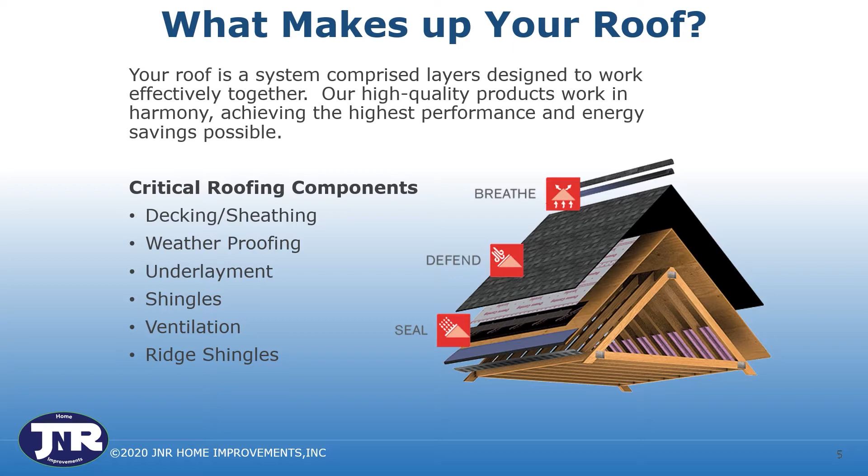Today we're going to do a product demonstration on the Owens Corning Cool Roof product. There are three primary components to a roof. One of them is obviously the shingle or the tile that would be the top layer. The second and most important component of a roof would be the underlayment. And then the third would be either called the decking or the sheathing, which would be the wood.

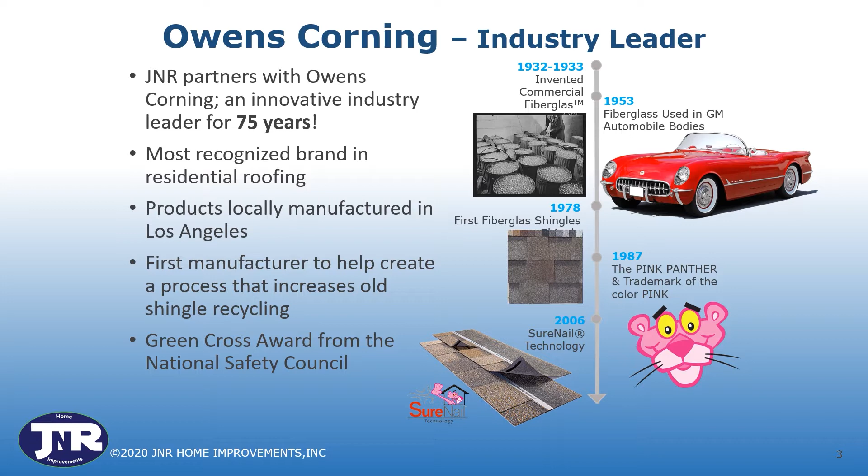We have partnered with Owens Corning, which is the premium manufacturer of roofing materials in North America. The company's been in business for over 75 years. It is the most recognized brand in the residential roofing industry. They're the ones that invented fiberglass, used the very first time in automobiles back in 1953.

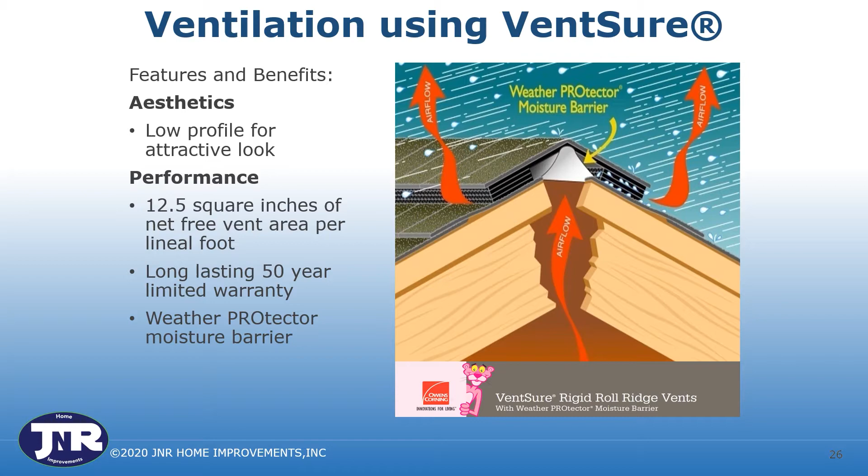So you've got the ridge shingle, then you've got the ventilation component of it. And as you can see here in this illustration, there's gaps in between the sheathing and the underlayment. That allows the roof to breathe. Now, what happens with a typical roof is that it gets heat from both sides. So you get your tremendous heat coming from the outside, and then obviously heat rises from the inside. And what you get is what we call a double bake effect, which basically is cooking that roofing material.

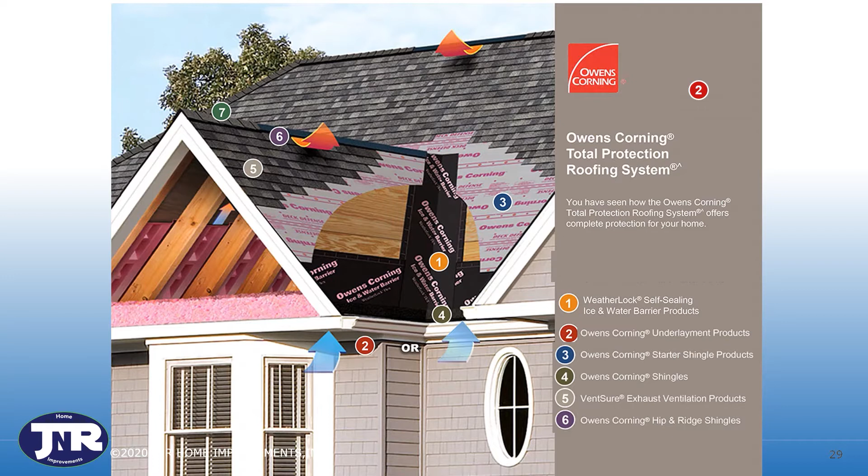In some cases, on a hot summer day, especially up here in the Antelope Valley, you'd be looking at upwards of 200 degrees. Now, the other component that we obviously are dealing with is the actual shingle. Owens Corning uses a much thicker shingle than a lot of the inexpensive materials that you would buy at, let's say, a Home Depot or a Lowe's. And for those of you who've purchased homes in the last, let's say 15, 20, 25 years, those roofs were only designed to last maybe 10, 15 years.

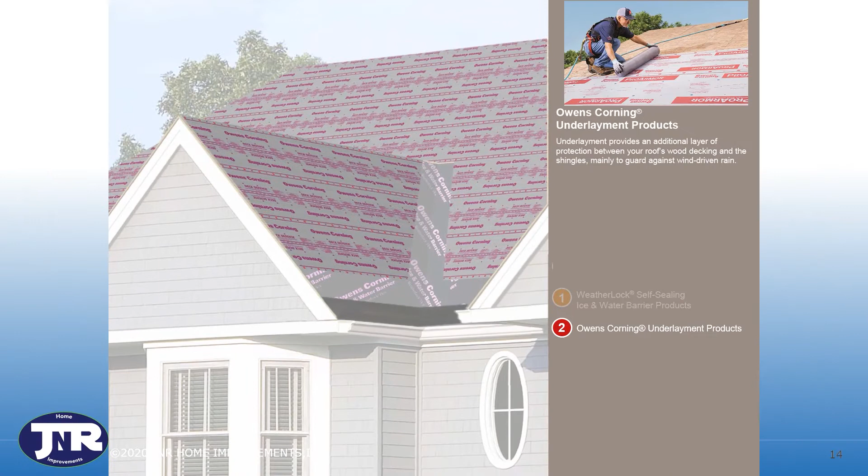And the reason for that is what's called the underlayment, which is by far the most important element of a roof. The underlayment is the moisture membrane or the moisture barrier that prevents water from getting into the wood or into the sheathing. Most inexpensive roofs use essentially a felt paper material, which is really no different than construction paper that's dipped in oil and tar. And you can see that it's very brittle. It tears just like paper.

And so the problem with that is that over a period of time, with the heat and the cold and the expansion and the contraction due to the external elements, this becomes an extraordinarily brittle material that essentially disintegrates. The underlayment that Owens Corning uses is a fiberglass underlayment, and the difference is that this is made out of hundreds and thousands of different fibers woven together that acts as a much more effective repellent.

So the layers of the roof start with the wood, with the sheathing. This is actually called OSB board, which is a much more rigid type of composite board that the premium roofers are using. On top of the decking comes the underlayment, right? So you've got the decking and the underlayment, and then on top of the underlayment goes the shingle, okay? So you've got really a three-part component.

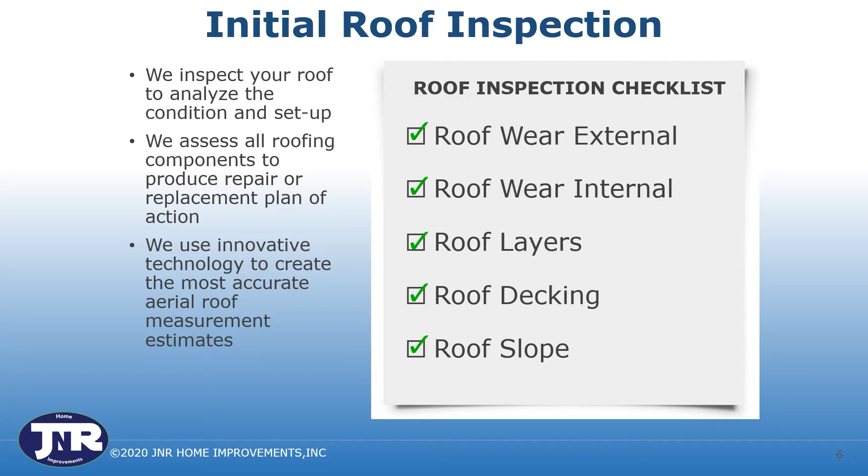The process with roofing is a multiple step process. So the first thing we're gonna do when we come out to your property is an exterior inspection, which would be to check to see how many layers of shingle you have currently. And we are actually going to get up on the roof. It's really the only way that we can identify some of the problems.

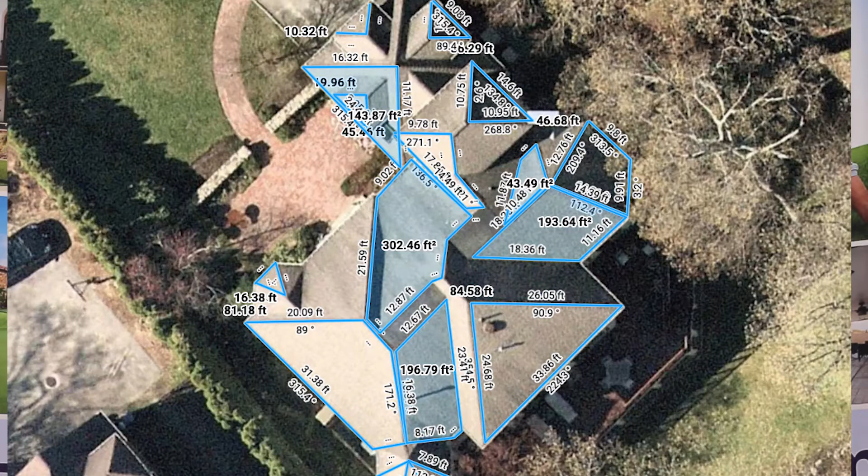The other way that we're gonna measure to get precise dimensions is we use a satellite imaging software, which basically takes a satellite image of your roof, allows us to do a very, very accurate measure, and that's gonna give us the ability to give you the proper price.

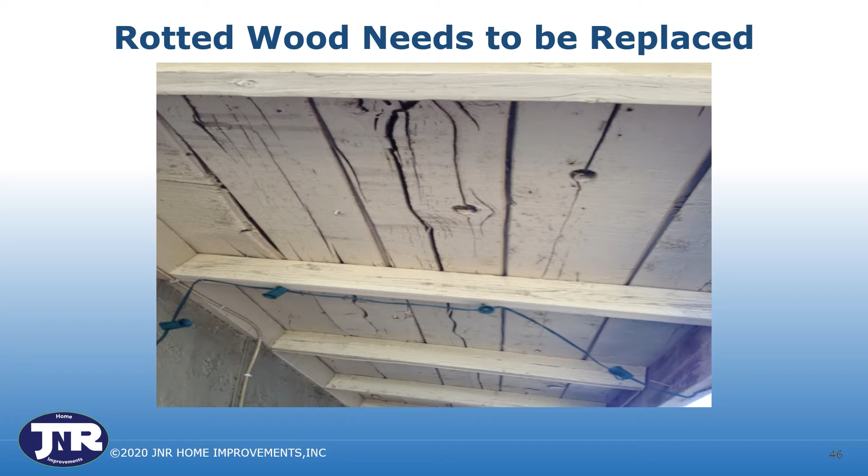Not only are we gonna come out and do an inspection, we're gonna get up on the roof, we're gonna look to see how many layers are already there. We're going to inspect the edges. A lot of times you've got damaged fascia board. The water has dripped under to the eaves and the soffit.

So one of the things that we're going to do is we're going to inspect the decking. Typically that is done from the inside. We would get up into the attic with a ladder and we would take very high resolution pictures. And what we're looking for is water, dark patches of water on the wood. And that typically is a newer leak. Anything that's older would be white and crystallized.

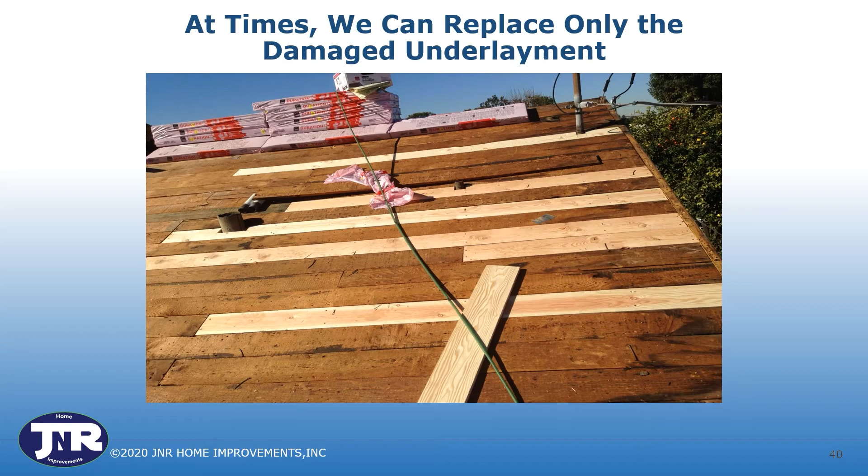Then we get up on the top of the roof. In order to inspect the decking from the exterior, we're gonna peel back the existing shingle so that we can get back and identify the wood. Most of the time we find about 20 to 30% of the decking needs to be replaced. In an older home, we probably would have to replace the entire decking.

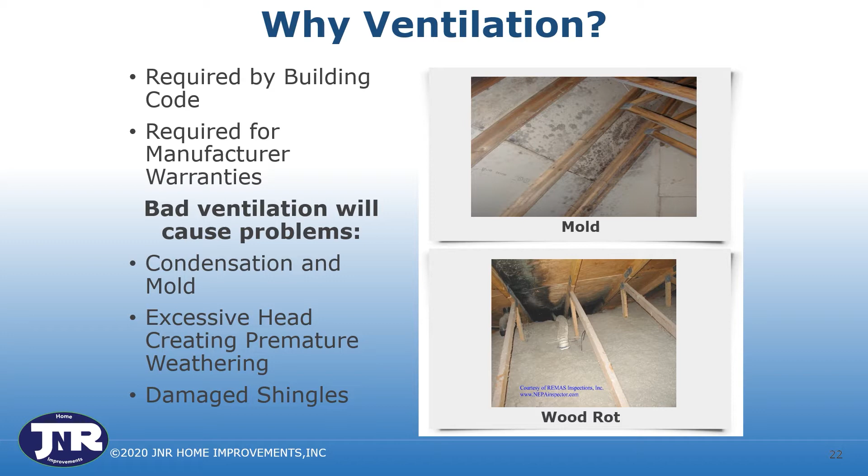When the heat comes from the inside up through the attic, it needs to be able to escape. That's why you see a lot of these kind of half circle vents, and you get the whirly-birds on top of the attic. Those are obviously for ventilation purposes.

The third problem that we see is what we call granule loss. An inexpensive roof or an inexpensive shingle is going to have tremendous loss of granules. Now the problem with that is that once the granules have eroded, which is really the layer that repels the water, you get much more water infiltration and moisture that gets absorbed, gets through the shingle, goes through the inexpensive underlayment, the felt dipped in tar and oil, and then obviously gets in and starts to affect your decking.

Now, the other thing, as I mentioned also, is the exposed fiberglass. We normally would see that at the peak of the ridge cap, but again, on an older roof, a 15, 20, 25-year-old roof that was really only designed to last 10 or 15 years, you're gonna see tremendous fiber exposure. Any erosion in the shingle is gonna increase what?

Water infiltration. The other thing that you're gonna deal with is buckling, curling, and cupping. And what that is, again, an inexpensive material over a period of time is not gonna lay flat on the sheathing or on the decking.

And then the other thing that we find is literally missing shingles. With an inexpensive roof that isn't bound tight or isn't nailed down properly, the shingles over a period of time just blow off. You'd be shocked. You get high winds, especially up here in Antelope Valley where we get really high winds. It's very, very common for shingles to literally blow off.

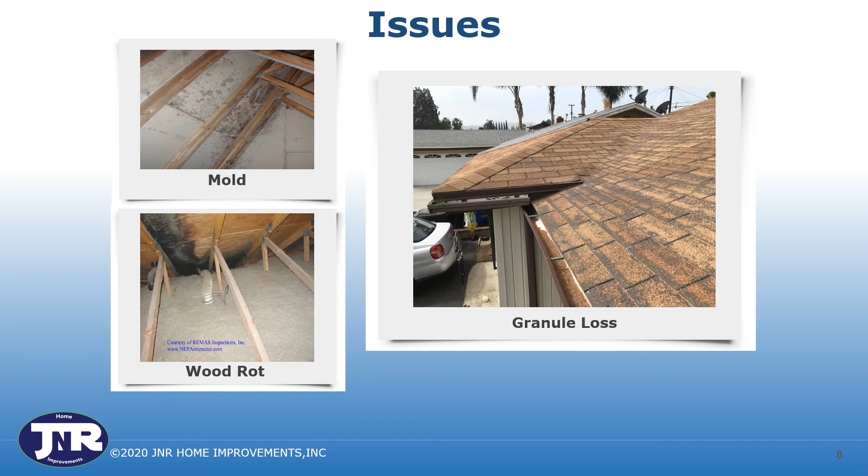Well, what is wood rot going to do? It is going to deteriorate and weaken the structure. A roof is heavy. So if you damage and deteriorate the overall strength and rigidity of the building material, it's very likely that you could have some structural damage. And then we're not looking at a $20,000, $25,000, $30,000 roof. We're looking at an $80,000 to maybe $140,000 overhaul.

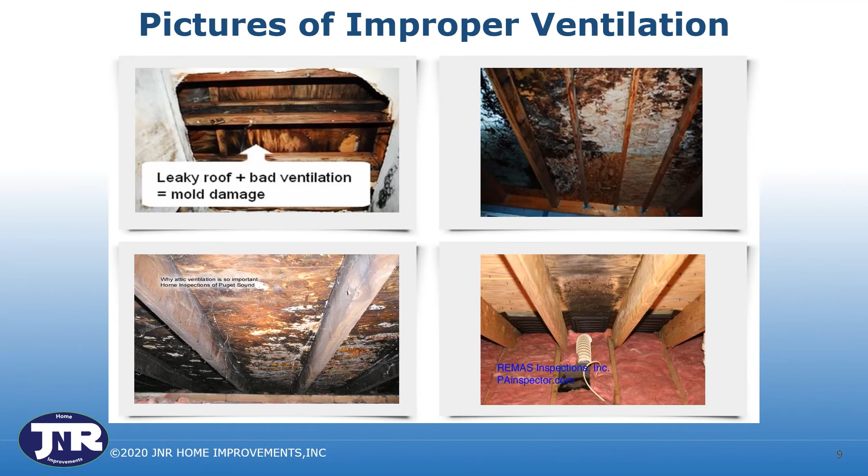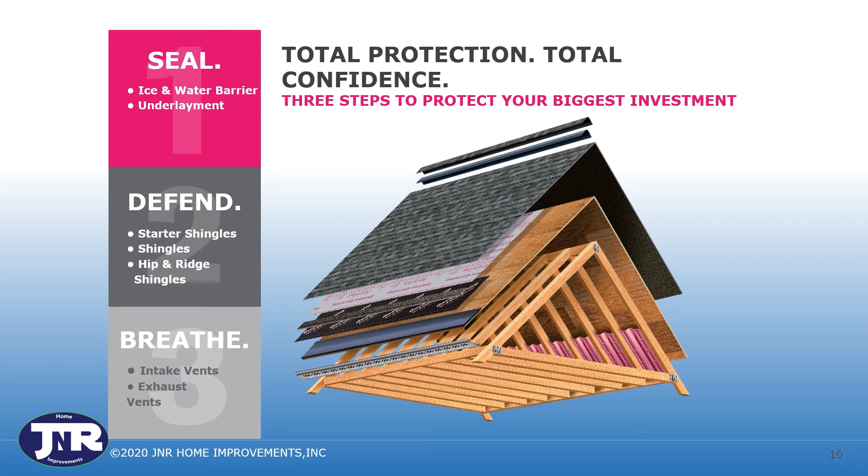Now, again, one of the things that we talked about before is really the three components. We've got the seal, we've got what we call the defend, and we've got the breathe, all right? So the seal would be the ice and the water barrier, which is the underlayment that we talked about. The defend is gonna be the shingle, right? It's gonna be the hip ridge or the ridge cap, and then it's also gonna be the thicker, more durable shingle. And then the breathing component of it would all be basically on the ridge caps, where you've got the ability for the air to escape. And then we also install a certain number of attic vents.

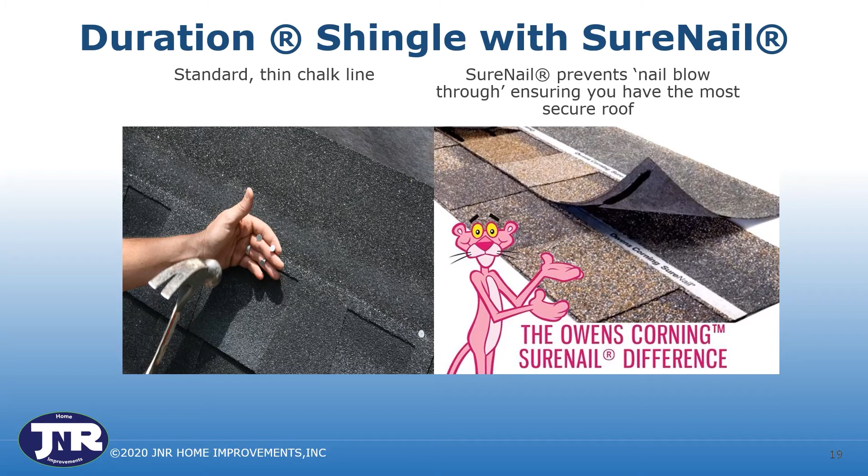What you're looking for from that standpoint is that once we've done the deck replacement, then it's time to go with the deck defense, okay? Now, the deck defense, again, is the Owens Corning fiberglass underlayment. And this is gonna go on top of the decking. Once we get through the underlayment process, then we're gonna use the Owens Corning shingles. One of the things that I do wanna point out, it's called the Owens Corning SureNail system. You can see here very clearly that it basically gives the guys a much easier place to put the nails. So that SureNail system is super important.

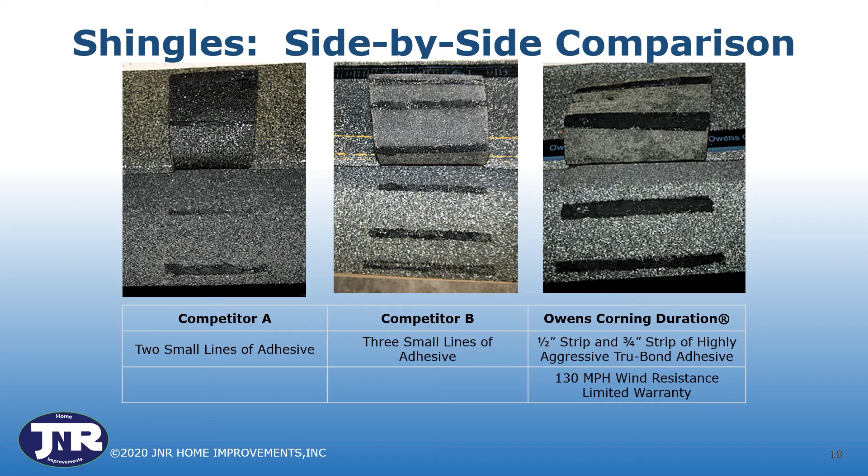Now, the type of shingles that are out there, we use the Owens Corning Duration line, which is the highest quality product that Owens Corning sells. So not only does it have the highest water repelling agent to it, but it also acts as a heat reflector. This is a critical component to the Owens Corning cool roof. The cool roof is going to reflect the ultraviolet rays back into the Earth's atmosphere, which is going to cut down on the heat anywhere from 50 to 70 degrees. As you can imagine, that has a tremendous effect.

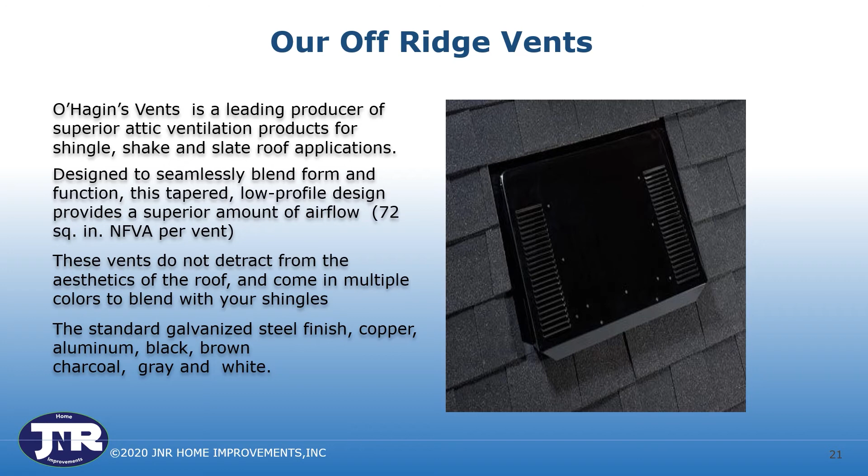What we're going to do is we're going to install dormer vents rather than whirlybirds. The dormer vents are what's going to help ventilate the attic for you. And depending upon the size of the roof, you get a certain number of them. Typically, we're going to install anywhere from 5 to 7 dormer vents. Those would be included in your price.

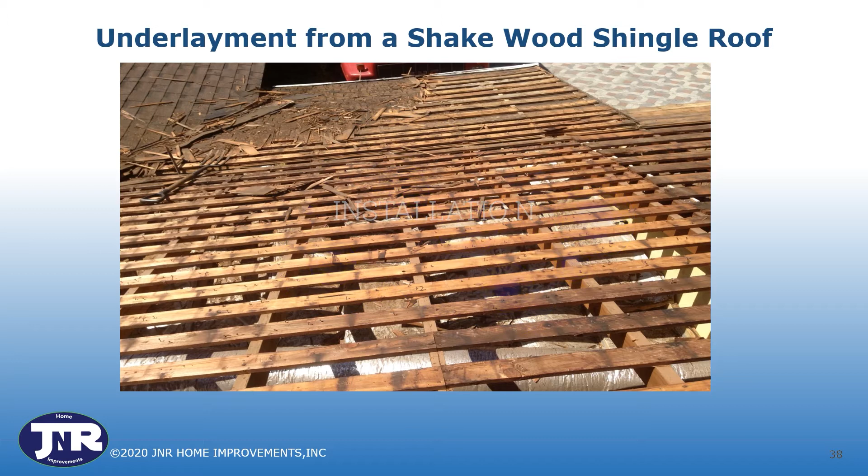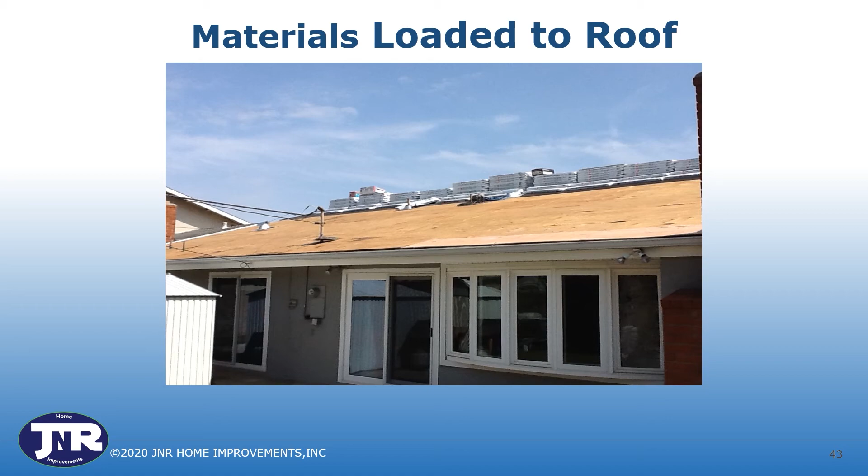The first day is going to be the tear off. That next day, we're going to do the wood replacement. So that would typically be day 2. On that day, we're also going to do the weather lock and the deck defense, with obviously the underlayment. At that point, we're also going to do the starter shingle and the edge metal, which would be on day 2, sometimes pushing over into day 3. And then we're going to install the proper venting in the ridge caps, and that completes the project. Typically on a good sized roof, we're looking at anywhere from 3 to 4 days before we are completely finished.